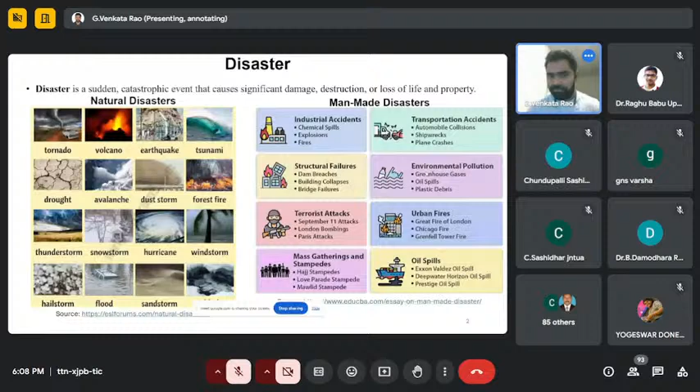The other category is man-made disasters. As I mentioned, any event that includes damage to property or loss of life can be called a disaster. Damage to property includes even motor vehicles or automobiles, for example, transportation accidents. If an accident happens, there will be damage to the vehicles involved, and also damage to the people in those vehicles. Such events are also considered disasters, but the magnitude will be small. Man-made disasters are more vulnerable because they occur very frequently, and among these, transportation accidents are very frequent and cause more damage.

If you look into a single event, it has a small magnitude, but when you aggregate all of them, it has a huge impact, even comparing to the other man-made disasters. But none of these will cope up with the natural disasters.

Here are some examples of natural disasters. If you recall the recent massive floods in Kerala, and the massive floods in Andhra Pradesh and Telangana earlier this year, unfortunately the high-resolution satellite images were not revealed to the public. So the only high-resolution satellite images I could find for the latest flood events were the Kerala landslide events that happened in 2024.

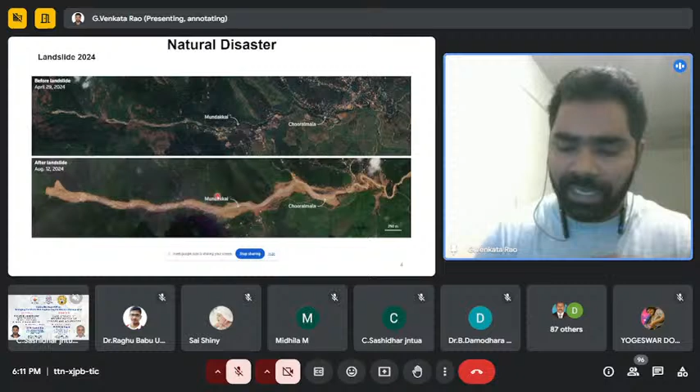If you look at the above satellite image, here the landslide happened and all the debris flowed up to this portion - this is the satellite image after the landslide. If you look into a closer look, here is a closer look for one section of that particular landslide area.

If you look at this particular image, taken before the landslide, there are so many buildings or houses - this is a residential area. If you look at the same residential area after the landslide, all the buildings got vanished. So that is the impact the landslide can have on humans or on property.

Here is another example of man-made disasters. Now everyone is familiar about the wars between countries because of the ongoing wars across the world. This is one image for an ongoing war, and this satellite image was taken before the war, on October 25, 2023.

For the same area, the satellite agency released a new image after the war. If you look at the new image, everything got vanished, and there are no proper road facilities or anything - because of this war, everything got vanished.

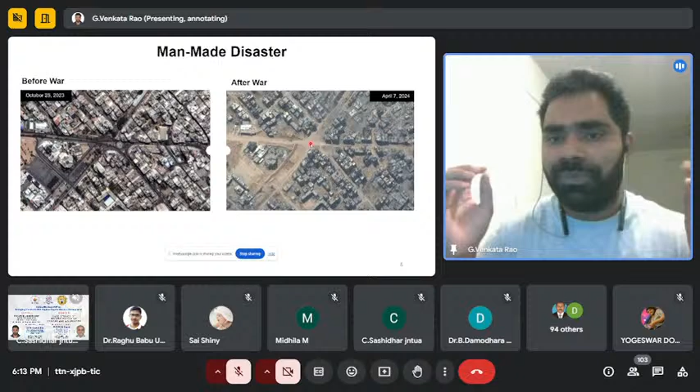So to minimize or assess the impact of these disasters, the effective way is having a disaster management cycle. Disaster management is defined as the discipline and profession of applying science, technology, planning, and management to deal with these extreme events. For example, if you want to assess the impact of a disaster, you need to apply the latest technology to do the disaster management effectively - applying science, technology, planning, and proper management to deal with those disaster events. The major focus of disaster management is to prevent and minimize the losses, whether to property or to human lives.

This can be done in four ways. The first one is mitigation or prevention. The second one is preparedness. The third one is response. And the fourth one is recovery.

Mitigation refers to the actions taken to reduce or eliminate the long-term risks and impacts of a disaster. For example, take Japan - everybody knows Japan is prone to frequent earthquakes. So the designers or people working in the construction industry in that country are well aware of the earthquake frequency and magnitude, how earthquakes occur there. When they design their infrastructure, they consider those earthquake magnitudes and design their buildings to resist or withstand that earthquake magnitude.

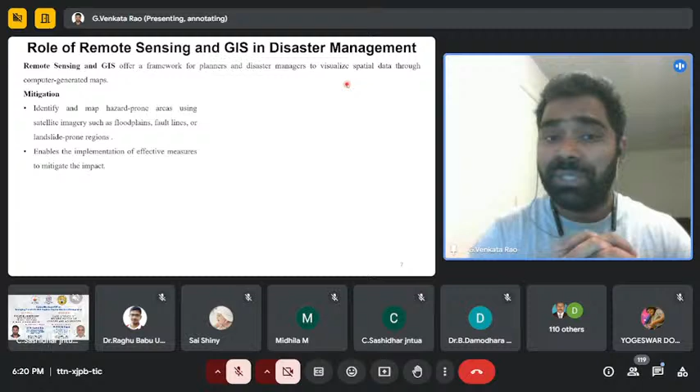When it comes to preparedness, remote sensing helps in identifying areas which require emergency attention. For example, when you have real-time data and there's a flood event happening in those locations, by just visualizing or looking at the map, you can direct your emergency rescue team to that particular area.

Another example: if there's a fire accident and the control room gets a call from affected people saying there's a fire accident happening in their area, the control room will identify the nearby fire department and pass the information to them so they can reach the area very quickly. That's another role of remote sensing and GIS in disaster management.

When you look at the maps, they provide relevant locations of the concerned departments for disaster management, the agencies and human resources personnel, where they can act very quickly to do rescue operations in disaster prone areas. Having a map simplifies strategy planning for security and shelter providers.

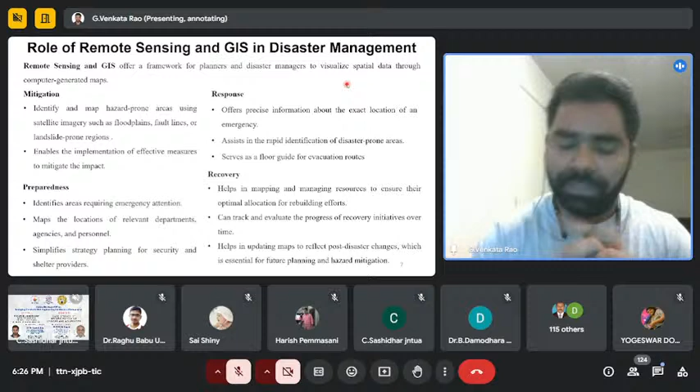Now coming to the basics: remote sensing is the science of obtaining information about physical phenomena of an object or feature on the Earth's surface, measured from a distance without being in physical contact with the object of interest.

For example, looking at this image, these are the features on the Earth's surface, and this is a sensor. If someone wants to collect information about features on the Earth's surface, they can do so from a distance, which could vary from one foot to thousands of kilometers.

Collecting information without physical contact—for example, even now I'm in a remote location for you, and you're in a remote location for me. We're not in physical contact, but we're exchanging words. This is also one kind of remote sensing—obtaining information.

So now you're getting information about the role of remote sensing and GIS in disaster management. This is one kind of information, a basic example of remote sensing.

Remote sensing is the art of obtaining information about features or objects on the Earth's surface. These features or objects could be anything—a tree, an insect, a human body, a house, or anything on the Earth's surface.

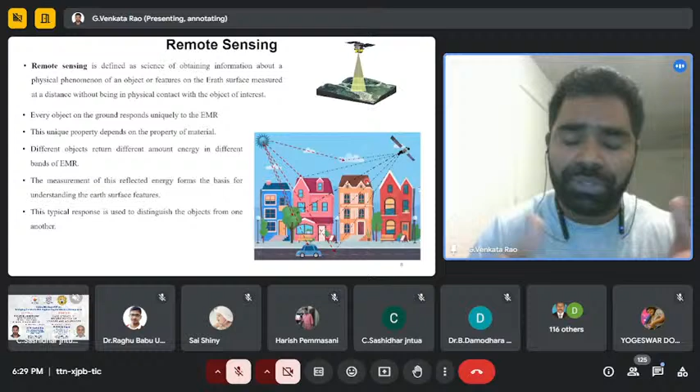Electromagnetic radiation consists of a range of rays, varying from gamma rays all the way up to radio waves. Among all these, only some portion of the electromagnetic spectrum is used for remote sensing and GIS purposes, mainly the optical region, which varies from 0.4 micrometers to 1 millimeter, consisting of visible and infrared regions used for data collection and analysis.

Since the past two or three decades, because of advancements in technology, people are also using microwave remote sensing for data analysis. Apart from microwave, there is another spectrum called radio frequency, which is used in geostationary satellites for satellite telephone communication, TV telecasting, towers, and so on. These are the electromagnetic spectrum ranges for each region of remote sensing and GIS, and they have different applications.

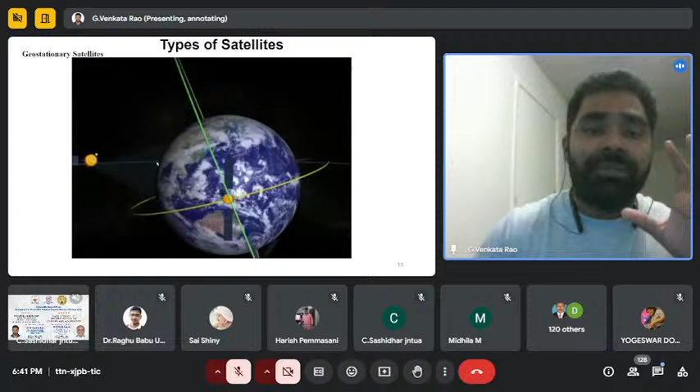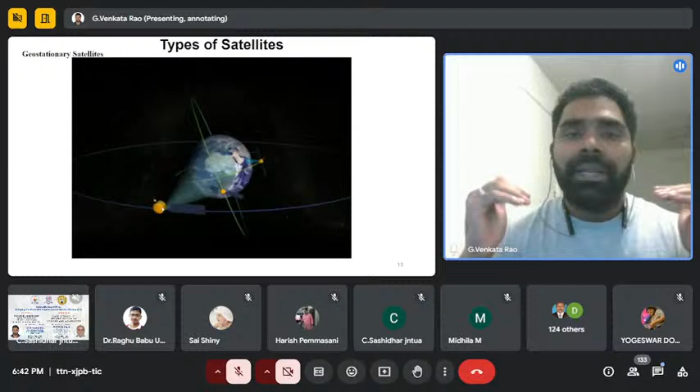For example, if you look at this particular image, this is the geostationary satellite which is placed at a height of 35,000 kilometers from the Earth's surface. Always this satellite will be looking at one particular area on the Earth's surface, and it takes one complete day to revolve around the Earth's surface, because the rotation speed of this particular satellite will be equal to the Earth's surface, and its position is relatively fixed to the Earth's surface, so that it will have continuous coverage for the same area over a period of time. These satellites are mainly used for communication purposes and some meteorological observations.

The next one is the polar orbiting satellites. The polar orbiting satellite means the satellite will revolve from North Pole to the South Pole, and it takes 90 minutes to complete one revolution around the Earth's surface from North Pole to the South Pole.

Basically for these polar orbiting satellites, active remote sensing sensors will be used, because on one side of the Earth's surface there is sunlight, and on the other side there won't be any sunlight. So to collect data even during night time, the satellite sensor should have the capability to send electromagnetic radiation and receive electromagnetic radiation. For that purpose, active remote sensing satellites will be used in this particular category.

The next one is the sun synchronous satellites. These are also a type of satellite which orbit from North Pole to the South Pole, but these satellites are designed in such a way that the path of the satellite gradually shifts, so their orbit gradually shifts to always stay aligned with the sunlight.

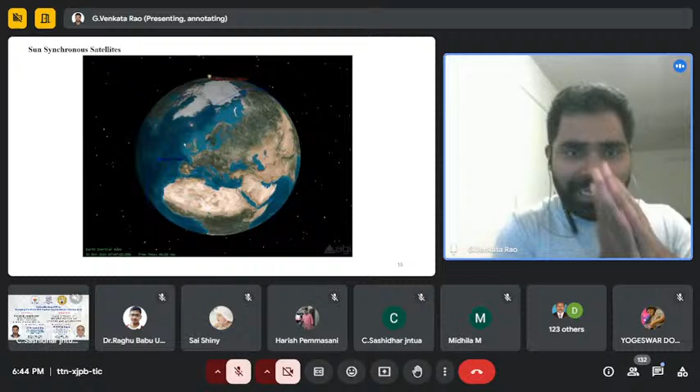For example, if you look at this particular region, the satellite is adjusting its orbit so that it can align with the sunlight. Whenever there is a transition from day to night time, at that location the satellite will align its orbit, and then it will collect the data continuously.

This kind of technology will be used in passive remote sensing sensors, because they don't have the capability to emit electromagnetic radiation, but they have the capability to collect the reflected electromagnetic radiation from the Earth's surface. So the sun synchronous satellites are basically used with some kind of passive sensors.

The next one is resolution. Resolution is the most important term in remote sensing, which defines the applicability of remote sensing data for any application, not only for disaster management but for any application - it could be land use land cover classification, soil classification, water bodies identification, or whatever it is. So the accuracy and analysis of the particular data will depend on the resolution of a remote sensing image.

Resolution is defined as the minimum distance between two objects that can be distinguished in an image. For example, if you look at an image and are able to distinguish two objects without any difficulty, then that will be called resolution. In remote sensing, we have four types of resolutions.

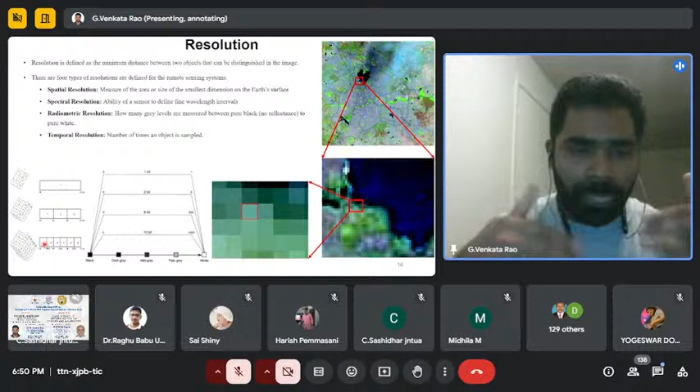The next one is temporal resolution, which means how often a satellite can visit the same area for data collection. As I mentioned, in a polar orbiting satellite, the satellite takes 90 minutes to complete one revolution around the Earth's surface. That doesn't mean the temporal resolution is 90 meters, but 90 minutes. Temporal resolution means the time taken for the satellite to visit the same area on the Earth's surface again.

The next one is spectral reflectance, the most important term in remote sensing to distinguish different objects. The basic principle of remote sensing is distinguishing different objects based on how much electromagnetic radiation is reflected from those objects. Based on that, each object will have a unique spectral reflectance curve, and objects are classified using these curves.

These are some satellite images, specifically Landsat images. As mentioned, passive remote sensing works in the visible spectrum, and they divided the entire visible spectrum into bands. These bands have different information. The first one, band one, is blue, ranging from 0.45 to 0.52, and then it varies for the other bands.

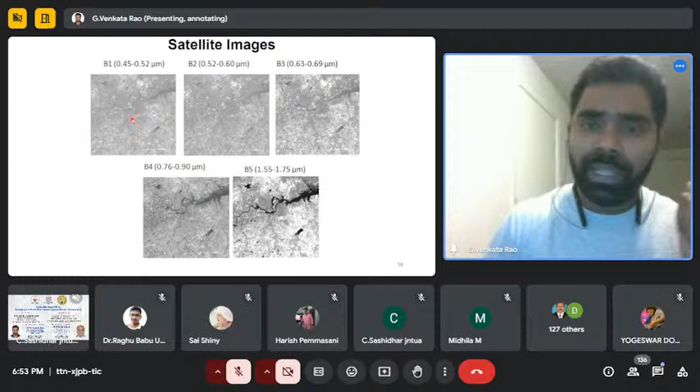And for vegetation also, the infrared region is the most effective, because that's the region where vegetation will have a maximum reflectance. And the next topic is Geographical Information Systems, GIS.

GIS is an acronym for Geographical Information Systems, and it is an integrated tool capable of mapping, analyzing, manipulating, and storing geographical data in order to provide solutions to real world problems, and to help planners or designers plan for future infrastructure.

GIS consists of 5 components: hardware, software, data, methods, and people. This is a GIS framework, which starts from input and ends at output, and in between it has different stages.

The first stage is data collection, input, and correction. For data collection, as I mentioned, from remote sensing data you will have a hard copy or soft copy maps. In India, the Survey of India is the main source for all of us to get topo sheets or Survey of India maps, and they provide those maps either in soft copy format or hard copy format.

When you want to use or analyze that data, you need to convert it into some digitalization format. Having a soft copy on your computer is not digitalization in the GIS framework. In GIS, digitalization means converting that data into editable data formats, and that is one of the steps in input data.

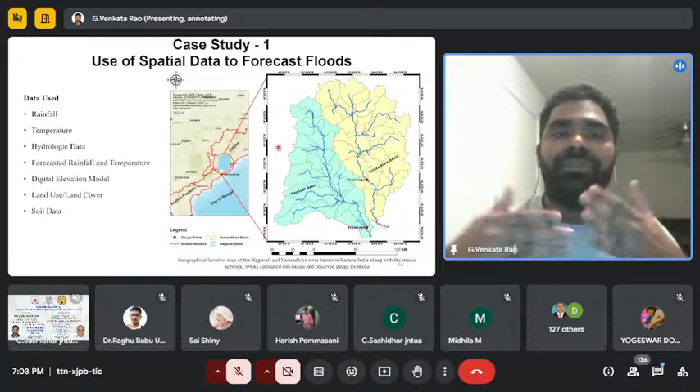The model has the capability to give flow estimates for each subbasin individually, but we don't have data to validate our model at any location except one in each basin. So we collected the flow estimates provided by the model at these two known locations, and then performed calibration and validation.

If you take monthly or annual data sets, then these statistics should be higher. For example, for monthly it should be around 0.75, and for annual it should be above 0.9. Then only those will be considered good. But when doing calibration for daily data, these will be considered good estimates.

So we did calibration and validation, and found that the model is working pretty well for the observed data. This is for the Nagavali Basin at Srikakulam Gauge Station, and then we did similar analysis for the Vamsadhara Basin at Kasinagar Gauge Station, and found slightly better statistics in Vamsadhara Basin compared to Nagavali Basin.

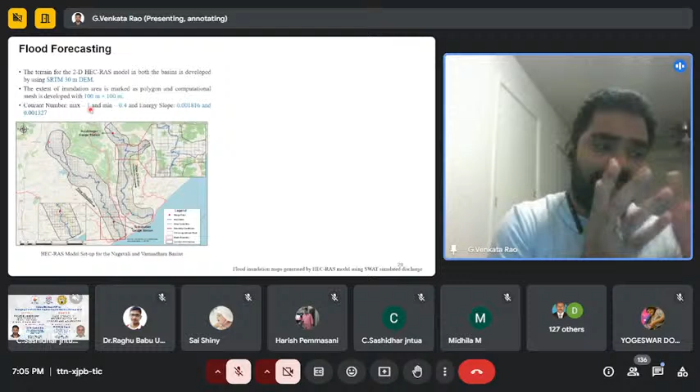Once we had all these flow measurements, we used a hydraulic model. Earlier, the SWAT model we used to convert rainfall to flow data was a hydrologic model. Now, once we converted rainfall into flow values, we used a hydraulic model which has the capability to convert flow values into flood inundation maps.

So here we used a HEC-RAS model to develop, predict, or forecast flood inundation maps in both basins. This is the effective area we used for flood forecasting. To forecast the floods, we marked this area and divided it into a 100 meter by 100 meter mesh.

We used these points as upstream conditions and gave the flow data at these locations. As we don't have validation at these locations, we validated the data at this particular location, and based on that, assuming the entire basin will have the same accuracy, we took the flow values at these locations and gave that as input to the hydraulic model.

Similarly, for the Nagavali basin, we gave flow data as input at these two locations and gave that as input to the basin.

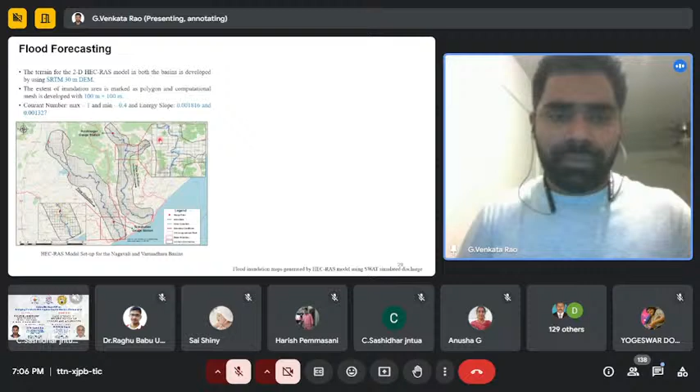Once after giving all the data as input, when we simulated the data, these are the flood inundation maps for the past events. We considered almost 16 events in the Nagavali basin and 16 events in the Vamsadhara basin, and we were able to generate flood inundation maps for each of these events.

And then these are the flood inundation maps for the Vamsadhara basin. So far, whatever model we developed was working pretty good for the past events. Now, based on understanding that this model works for past events, we started working on future events.

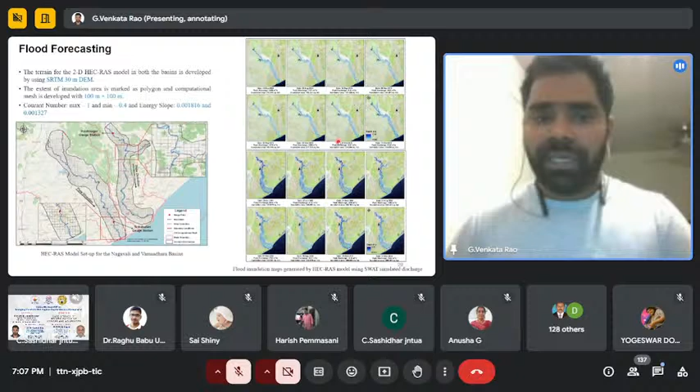For future events, as I mentioned in the data used, we used forecasted rainfall and temperature data to generate future flow data, and that was used to get future flood information about future flood events in these particular basins.

For that, we took one cyclone as a reference, the Titli cyclone, which caused severe flood in this particular Vamsadhara basin. This was the only data available for us to validate our model.

This is the actual flood inundation map, the actual area that got flooded during the Titli cyclone, and this data we got from NRSC. They provided this data on their Bhuvan website.

And then we used different data sets. The first one is the gauge data we got from CWC, Central Water Commission. And this is the flood inundation map generated by using that gauge data.

And then we used rainfall data provided by the Indian Meteorological Department to generate flow data, and we used that flow data as input for the hydraulic model to generate flood inundation maps.

Finally, to forecast the floods, we used rainfall from the Global Forecasting System, which has the capability to provide rainfall forecast for 16 days. We did proper validation and bias correction, and statistical analysis on those GFS data sets.

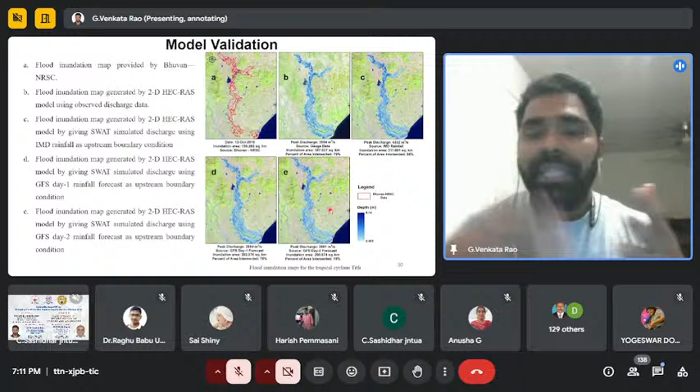So to do that, before that, based on all these flood inundation maps, we developed a vulnerability map, because now we know the flood inundation maps, since we considered all the flood events all the way from 1990 to 2018. And then we did all the flood inundation maps analysis, and based on all these past events, we did some vulnerability assessment.

That means how many villages, or what are the areas that are highly vulnerable to the floods, in both the Nagavali and Vamsadhara basins. And then we gave a statistical conclusion that almost an average area of 220 square kilometers, and at least 1 lakh people in 115 villages in the Nagavali basin are prone to the floods.

And if in future there is any flood alert going to be given in that particular Nagavali basin, then these first 115 villages need to be given priority. And the next one is around 270 square kilometers, and almost 135 villages in the Vamsadhara basin are prone to the floods.

So as I mentioned, it's not about how accurate our data is. Even if you have high accuracy data with you, if you're not communicating that data to the concerned authorities and to the people who are vulnerable to these disasters, then all the data is of no use.

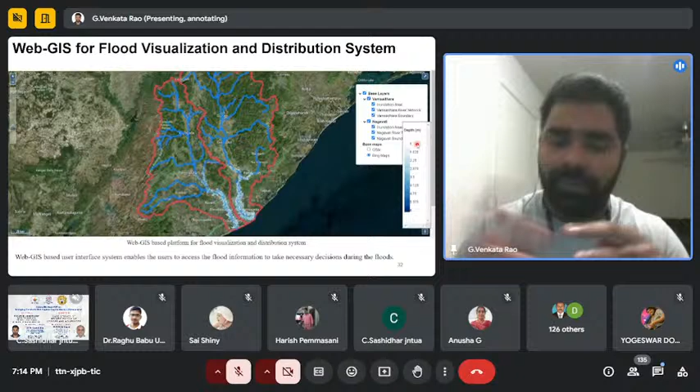And the other application is another disaster in India. I won't say it's a disaster, it's a frequent happening incident, that is the tropical cyclones. So starting from southwest monsoon all the way up to the end of northeast monsoon, either the Bay of Bengal or the Arabian Sea will experience some cyclones.

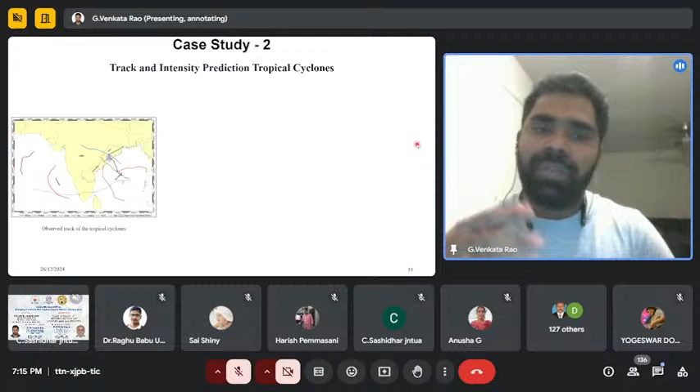And if you have prior information about the track and intensity of those tropical cyclones, then the government authorities or concerned authorities and rescue operators can plan their activities accordingly. And for that, I considered almost 10 tropical cyclones to develop a proper prediction system and all.

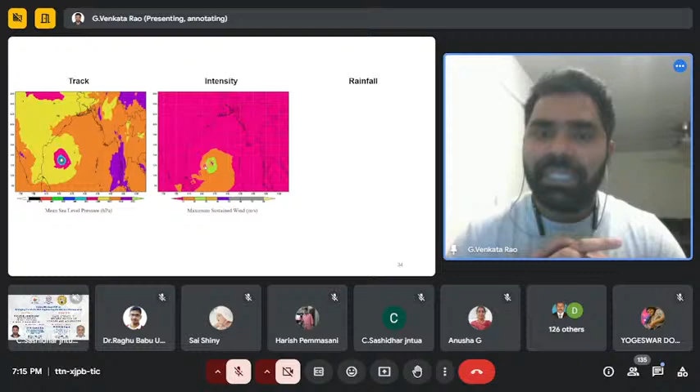This is the domain I considered for predicting tropical cyclones. I used the weather research and forecasting model to forecast these cyclones. Here is the predicted track for cyclone Hudhud, using mean sea level pressure to predict the track. We used maximum sustained wind to predict intensity, and finally predicted the total accumulated rainfall in millimeters for that cyclone.

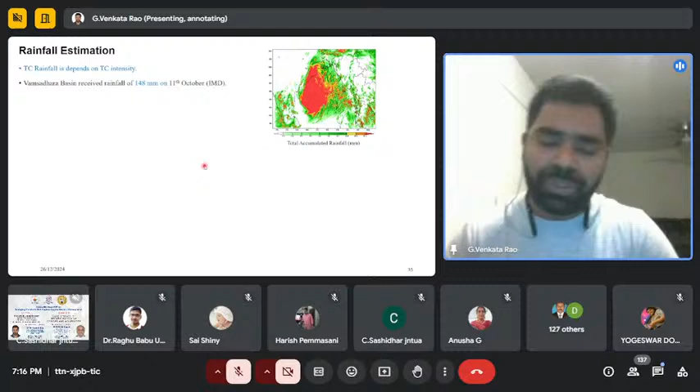We did some statistical analysis on how accurate the predicted rainfall was compared to observed rainfall. We considered the Vamsadhara Basin to validate our estimates.

From the observed IMD records, the basin received rainfall of 148 millimeters. When we compared that with our WRF model prediction, it provided nearly close estimates, around 200 to 220 millimeters. We also used global forecasting system rainfall data, comparing the forecasted rainfall with those data sets, which also showed good agreement with the estimated rainfall.

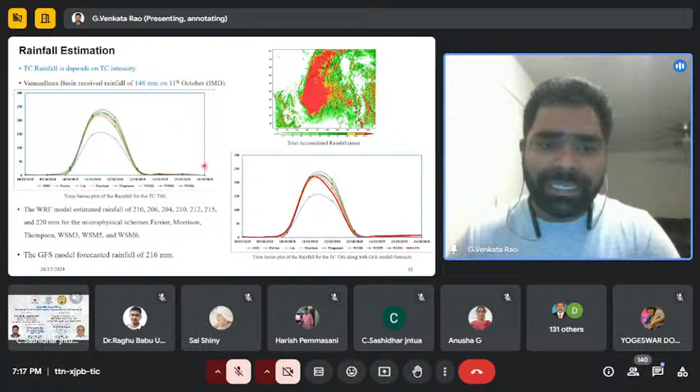There was a dam burst in Kenya on May 9th, 2018, caused by heavy rainfall in upstream areas. This dam burst took the lives of 48 people and caused large scale infrastructure and agriculture damage in downstream areas.

When the dam burst happened, since it's a remote area, we didn't have access to records of how much rainfall occurred. So we did this analysis completely depending on satellite, remote sensing, and GIS technologies. Some satellites provide really good estimates of precipitation.

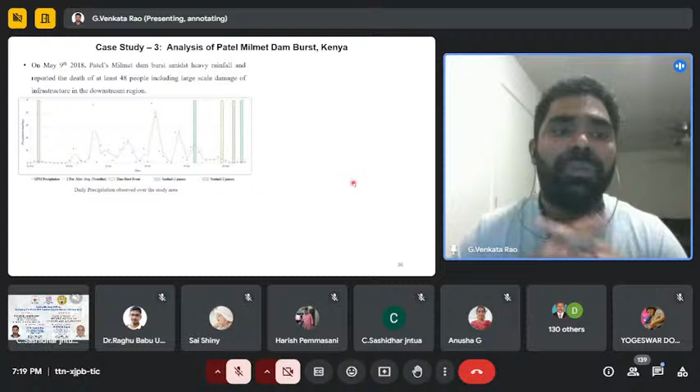So these are some examples of where you can use remote sensing and GIS for effective analysis. As I showed in my previous slides, remote sensing and GIS can be used for quick visualization of the magnitude of disasters that happen. That's all I have for today's presentation, thank you.

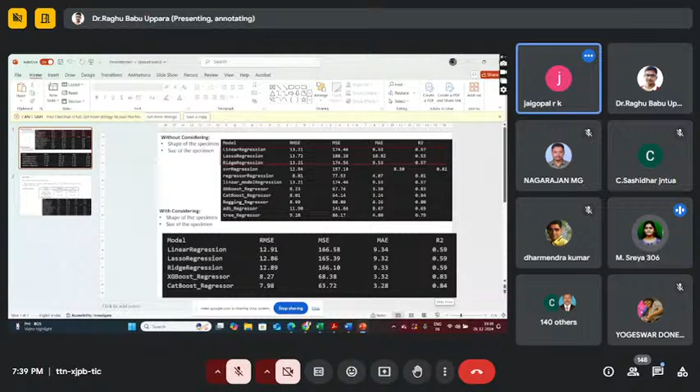Here, sir, there is a tab, right? Yeah, this one, I know. This one, sir. Can you see this one? Yeah, I can see that. No, I will have to make it, is it? We need to hit this button. Okay, this button, I'm stop sharing. Now please share your screen now, sir. Yeah.

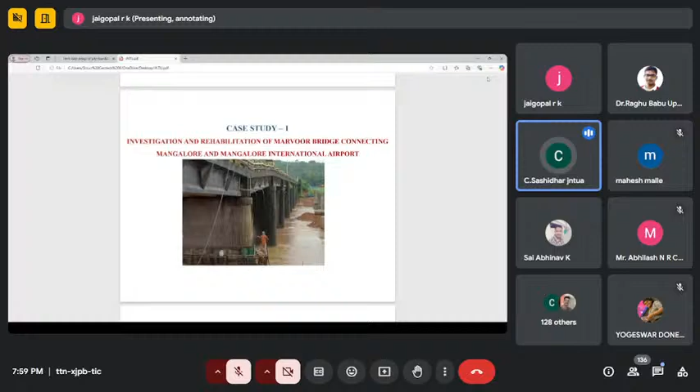I will continue. Sir, will you please zoom the PDF file, sir, if possible? In the top button, zoom, in the top, there it is, minus and plus buttons, right sir? In the top, in the middle, sir. Top, middle, this one? Yeah, that is okay, sir. Please click on it, sir. Yeah, I clicked on this. This is the thing.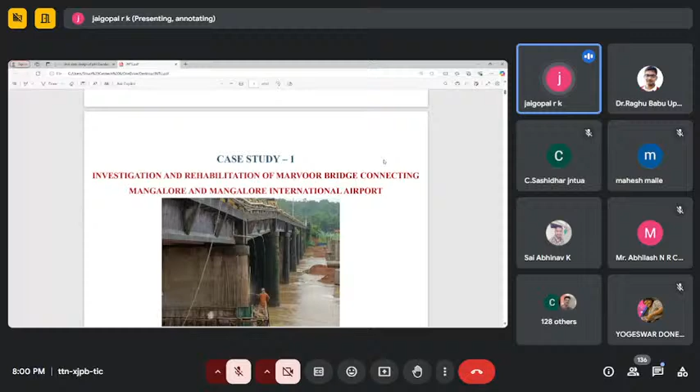Sir, just hit escape. Okay, escape. Now, see sir, there are minus and plus buttons there, right? This one? No sir, next one. Just hit on it sir. Plus, yes, right, sufficient? Okay yes sir. Just please scroll down, proceed, sir. While you are moving, just scroll the page. Okay, scroll the page. Yes sir, yeah, like this sir. Now it is good, sir.

I'll have to join the college again. Okay, anyway.

Now let me start with case study one, where we have done the investigation. Can you hear? I think now we can hear. Yes, good sir, it's good.

Okay, thank you. Case study of investigation and rehabilitation of Marvoor Bridge connecting Mangalore and Mangalore International Airport. This was the bridge actually. We did an investigation about 2 years back, I think. You can see here one of the piers here.

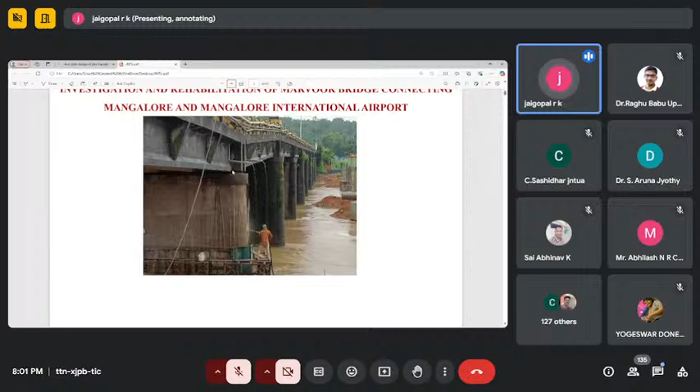One of the piers here went down into the river due to this scouring action. Extreme heavy flow was there in the riverbed. That's the reason it went down, and it was about to collapse. They suspected that it could anytime go down into the river. So that was an emergency case where we intervened and gave the rehabilitation.

The bridge is a vital link between Mangalore city and Mangalore International Airport, belonging to Karnataka Public Works Department. Length of the bridge is about 180 meters. It has 9 spans of 20 meters each. The bridge has RCC superstructure with 5 girder configuration and a deck slab. Pier and abutments are of RCC.

Piers are plate type. Pier and abutments are located on 2 RCC rectangular wells with a steining thickness of 450 mm. The depth of wells is 7 meter. Kindly note here, they were all old type well foundations.

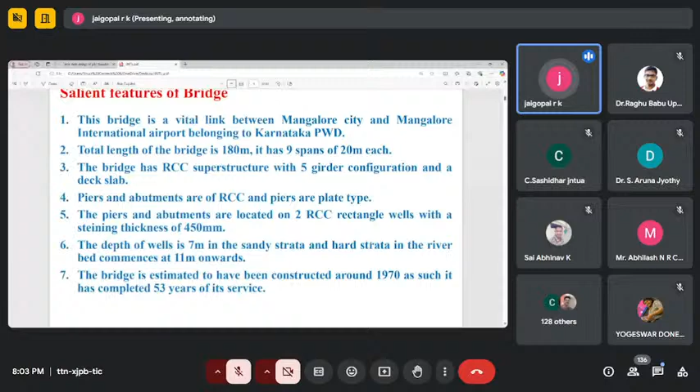Now, you can't see these wells nowadays because people are going for pile foundations. 7 meter is what we assume based on our earlier experience, because people are not going beyond 25 feet into the riverbed, as it was very difficult to work below 25 feet. So we assumed, and when we actually verified, it was only 7 meter into the riverbed, into this sandy strata. The bridge is estimated to have been constructed around 1970.

As such, it completed 53 years of its service. The sequence of distress was: there was extremely heavy rain and flooding in the river on 13th, 14th and 15th of 2021. Pier number 8 of the bridge suddenly sank into the riverbed by 700 mm on the 15th at 2:30 a.m. in the early morning, that is in the midnight, precariously positioning span number 9 and 8. Traffic on the bridge, including pedestrian traffic, was suspended.

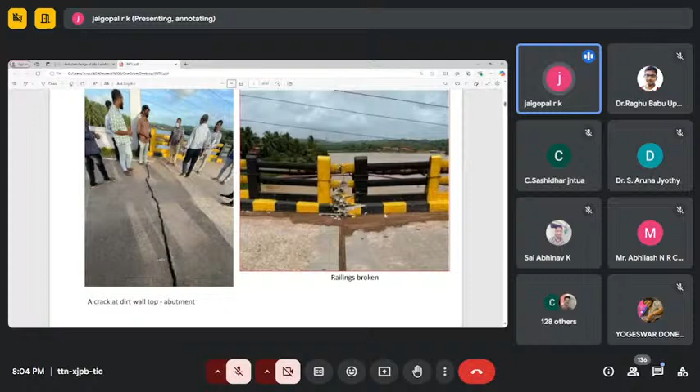Hope all of you can hear. Hello? Yes sir, yes sir. Okay, okay. The probable reasons for this scouring in the riverbed are the location of pier P8.

It reached almost 7 meter or more on the 15th, destabilizing both the well foundations, because one pier had 2 wells each under it, but they did not get washed out due to the water flow. That's a good thing, that the well foundations only settled down and did not wash out.

The well foundations as well as the pier sank into the riverbed by 700 mm, and it also resulted in shifting of both the wells. Kindly note here, you can somehow manage to correct the 700 mm that sank inside the bed, but the 300 mm shifting, that is sideways lateral shifting, is quite difficult to correct, because in those days they must have designed for all vertical loads and lateral loads.

There must not have been a provision for this at all. But we will have to take this into account, take some precaution, and take a risk that the 300 mm of lateral shifting that happened needs to be corrected while doing the rehabilitation. The pier has become three-dimensionally eccentric. That is the situation as far as this pier is concerned.

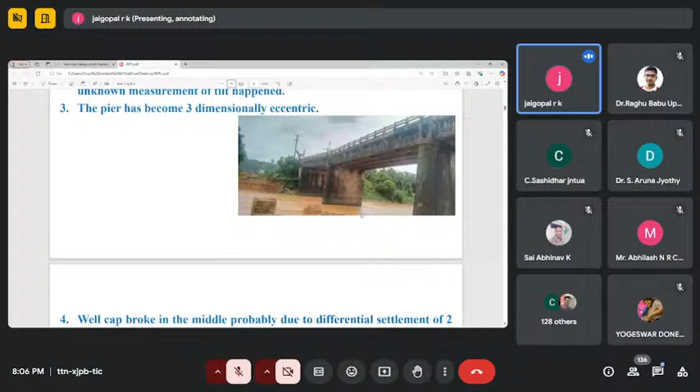This one - then, the result of that three-dimensional movement of the well of the pier resulted in the well cap breaking in the middle, probably due to differential settlement of the two wells, because this pier has got two wells here. You can see here one rectangular well, the other rectangular well. This one settled more compared to the other one, and that has resulted in the breaking up of the well cap here.

Here you can see there is a crack here, there is a crack here. These two cracks happened due to the breaking up of the well cap. Please, you can ask me any question in the midway also, it's okay.

No sound from that side. Hello? Yeah sir, yeah sir. You are audible sir, please continue sir. Please react a little bit here and there. Okay sure sir, sure sir.

This is the problem where the well on the left side is a rectangle well. You can see the cap there, well on left side, well on right side. These are rectangular wells, peculiar wells. Earlier we have seen circular wells, octagonal wells, whereas these are rectangle wells, 2 numbers per pier.

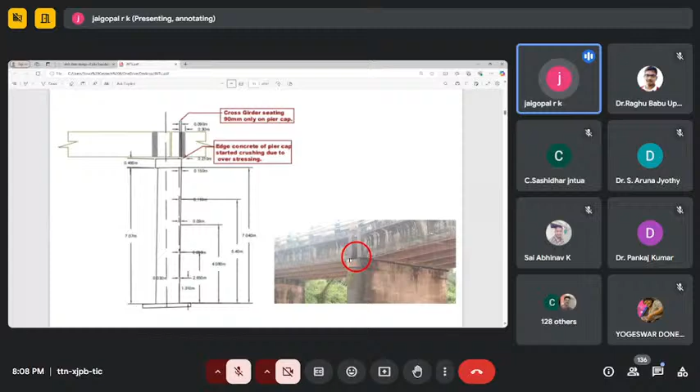This is the diagram of what happened when it got into the riverbed with side movement. You can see here, it was just the superstructure on the left side sitting hardly on the edge. The concrete of the pier cap started crushing due to over stressing. Because of the extreme stress, it was about to collapse, but somehow it was sitting by about 90 mm onto the pier. Otherwise it would have gone down and actually crushed the pier cap.

The precautions taken were: the situation was very fluid, wells were sinking, and the structure needed emergency measures to stabilize the foundations, or else two spans could collapse any moment. Even the pier along with the foundation could go into the riverbed or get washed away.

As an emergency measure, big size granite boulders of almost 1 meter size were packed. We had lost the frictional capacity of the well foundations in the sandy riverbed, so we needed to create frictional properties so the wells would have friction on the sides - soil structure interaction must be there. Earlier sand was there, now it was washed out, so we needed to put something. You can see the boulders brought from outside, and wherever scour happened in the riverbed has been packed and filled back with these boulders.

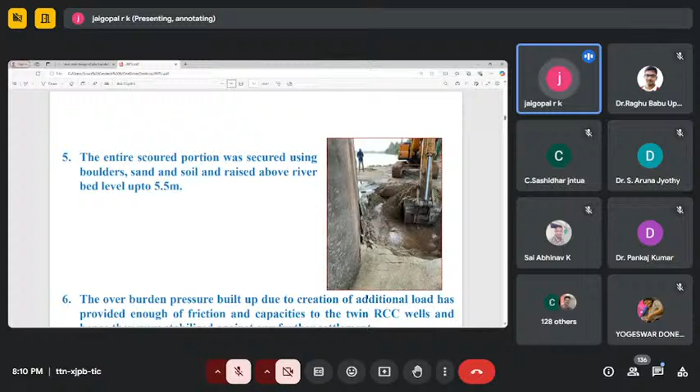Now the entire scour portion was secured using boulders, sand and soil, and raised above the riverbed by 5.5 meters. This gave us confidence that further movement and further sinking of the pier would not happen. Having created this barrier so the pier would not go down further, the already settled portion of the superstructure needed to be corrected.

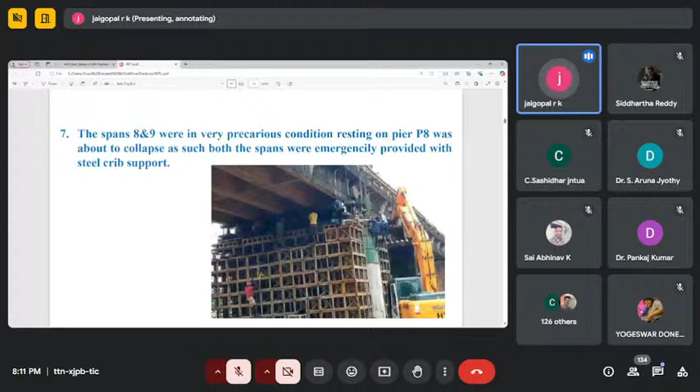So what we did was immediately procure some girders - a railway supporting system - and cribs. After placing the cribs temporarily, we placed certain jacks and lifted the left side span, placing the entire superstructure onto the cribs. We did the same on the right side also. There was a gap of above 700 mm above the pier without any support, but both superstructures were placed on temporary supports - the cribs acted as temporary supports.

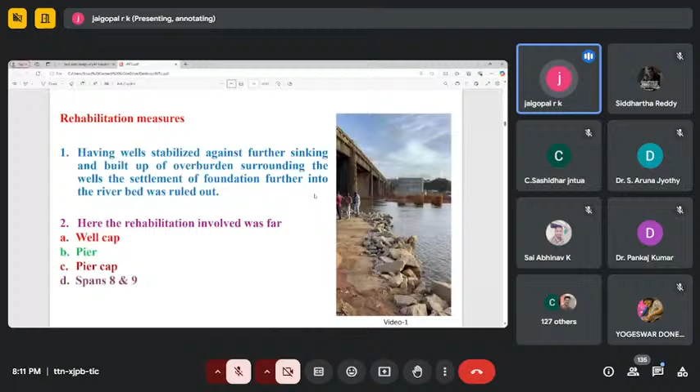Then came the rehabilitation measures - having the wells stabilized against further sinking with overburden built up surrounding them, further settlement of the foundation into the riverbed was ruled out. With that precaution taken, we had confidence the bridge could be saved. The rehabilitation measures involve the well cap, pier, pier cap, and spans 8 and 9 - 4 items to be tackled.

Coming back to the well cap, it needed to be rehabilitated because it broke - virtually it was not taking any further loads. You can see here, there are 2 cracks in the well cap. At any time it could break further, and the crack could propagate up into the pier. That was the situation, so we needed to do some exercise.

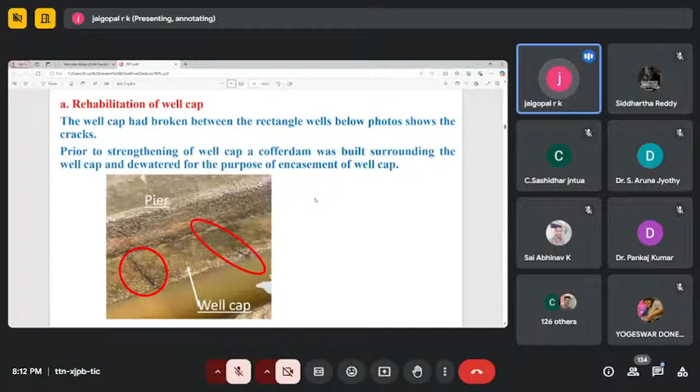That means we stitch the existing well cap with a new well cap and anchor it to the pier also, like this. You can see on the right side, this is the anchoring arrangement made. This is the existing well cap, this is the new well cap designed. The concrete strength was maintained at M70 so that the broken, lesser strength concrete inside is encapsulated using new concrete and new reinforcement. That way it was strengthened, along with the pier also.

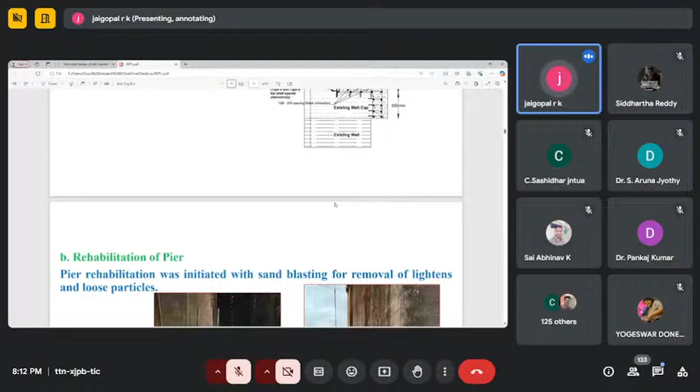This is where we started using sandblasting so it would have a better bond between the new and old concretes, along with bonding using epoxies.

This is the diagram - on the left side, the thickness of the pier encasement we did was more. On the right side, encasement was lesser, just to maintain the center of gravity of the whole pier. One side was more, other side was made lesser, which did not have any effect on the well foundations because we had already given full frictional capacity to the well foundation so that it doesn't move at all.

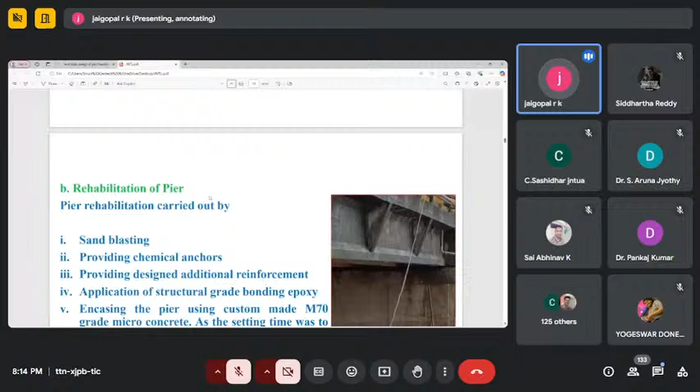This is one more drawing we prepared for anchoring the old and new concretes. Pier rehabilitation was carried out with sandblasting, chemical anchors, additional reinforcement was designed, and structural grade bonding epoxy was applied, encasing the pier using custom made M70 grade micro concrete. The new pier encasement got fully integrated with the existing pier, well cap and wells. This is the picture of the rehabilitated pier - you can see here on the right side.

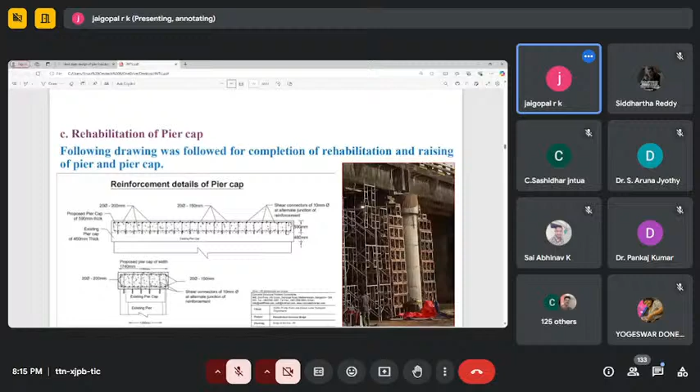Then you need to see here, there was a gap of about 700 mm which went down into the river. Both spans were simply stationed on temporary crib supports on both sides. So this cap was increased - the pier cap was increased by almost 700 mm so that it comes to the original level of the pier cap. That was one exercise we made. Again, we designed the whole of the pier cap and it was attached to the existing pier cap.

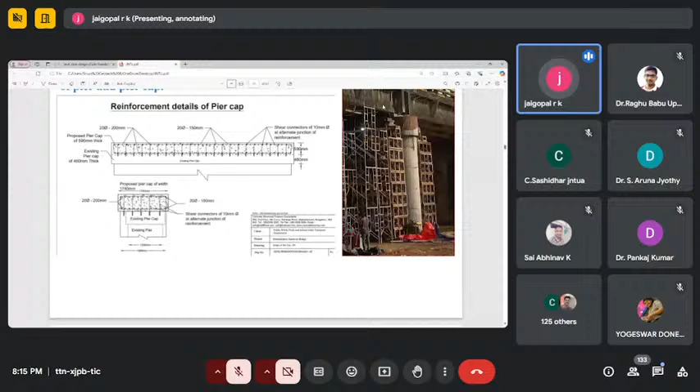I'll just skip a little here. Again, the bearings were placed, and after placing the bearings, we rested both structures, both spans on the neoprene bearings. The neoprene bearings were designed and placed below the girders here - we don't have a photograph of that, but that is what happened, I am telling you.

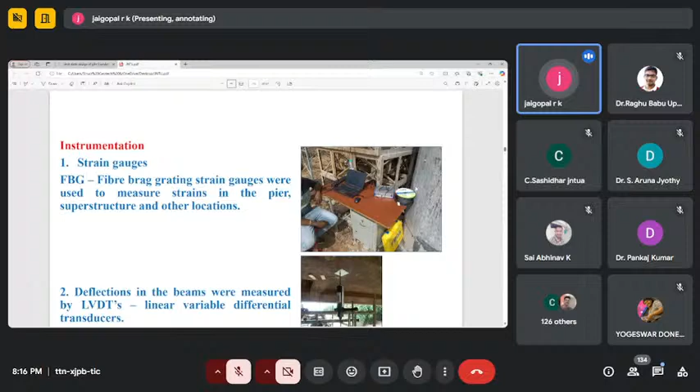And to check the strains in the pier, we provided FBG, fiber bragg grating strain gauges, which are absolutely accurate, at various levels to check the strain measurements in the pier, whether they are well within limits or any breaking is there. So we were verifying that. Deflections in the beams were measured by LVDTs, linear variable differential transducers. Temperature was measured by the thermometer.

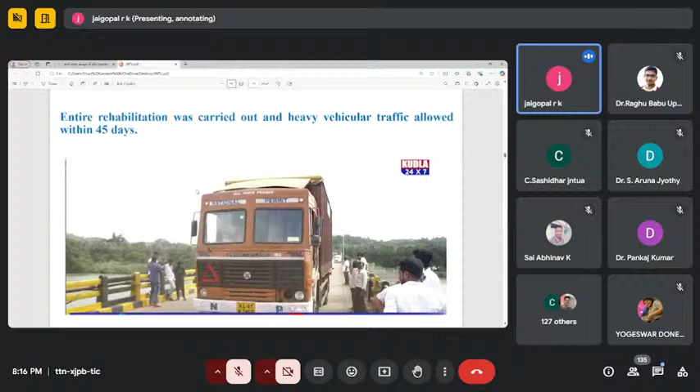Of course, load testing was carried out there to check whether the superstructure is in condition and transferring all these loads to the pier. It was verified as per the load test as per IRC SP 37, and the entire rehabilitation was carried out and heavy vehicular traffic was allowed within 45 days. There was resistance also from the public works department not to allow heavy vehicles - only cars or light vehicles, LMVs. So I told them, when we have done such a hard job, allow heavy vehicles in front of me only, in front of our team, so the public will also get confidence in using the bridge. That way, rehabilitation was completed successfully, and the public works department thanked us. In fact, the local MLA praised us so much, it came on TV continuously for 2 days.

Now, case study, I will just skip - because again it's a bridge, I'll show this some other day. Let me shift over to the aqueduct.

This is one of the important aqueducts which I wanted to show you for about 10-15 minutes. The rehabilitation of this aqueduct, 70 years old, washed out due to scour. This is the Hagri aqueduct, just at the border of Andhra Pradesh and Karnataka, about 3 kilometers inside Karnataka, built in I think 1953, with the piers fully dressed in stone and very neatly done work - unimaginable actually.

This aqueduct has octagonal wells - you must see the photographs, you will be surprised. And the dressing of the pier with fully dressed stones - I don't know, it is simply impossible nowadays to get these people and do such work. And that too, this is an aqueduct.

It was not at all leaking, absolutely no leak at all, for about 700 meters. No leakage in any of the joints, nor in the concrete, even after about 70 years, with no maintenance either. This is due to the honesty in executing the jobs - I can say it is absolute honesty. That's the reason it doesn't leak. If it were done nowadays, certainly it would have leaked.

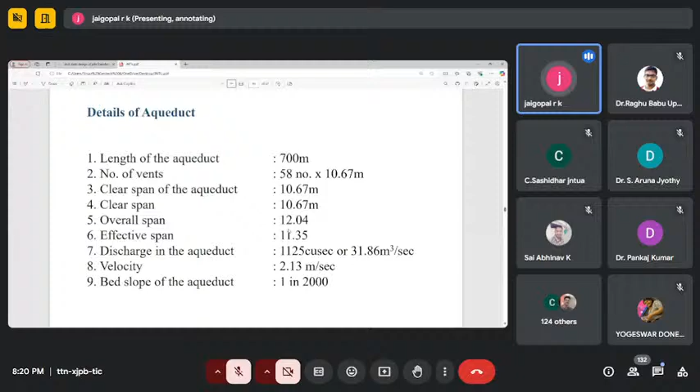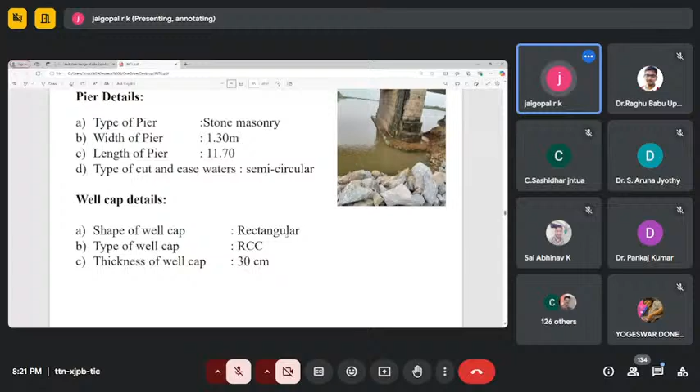Shape of the well cap is rectangle. Type of the well cap is RCC. Thickness of well cap is 300 mm, which we don't do nowadays, for your kind attention. This is 30 centimeter, 1 foot. Those days, whatever we have seen, majority, even what you saw in Mangalore, that is also 1 foot, 300 mm, which we don't do, because nowadays our cap designs, well cap or pile cap, are based on the strut and tie method of designing, which requires at least 1.25 to 1.5 meter thickness of well cap. That is the requirement of Indian Roads Congress nowadays.

You can see here, these are all damaged due to the settlement of piers caused by heavy water flow. It never happened before, hardly about 5,000 cusecs they were releasing in the river for the last 50, 60, 70 years. But suddenly, about 2 years back, they released about 1 lakh cusecs on that particular day. 1 lakh, where is 5,000? Where is 1 lakh? That has washed out. Cover was abundant, absolutely so much cover.

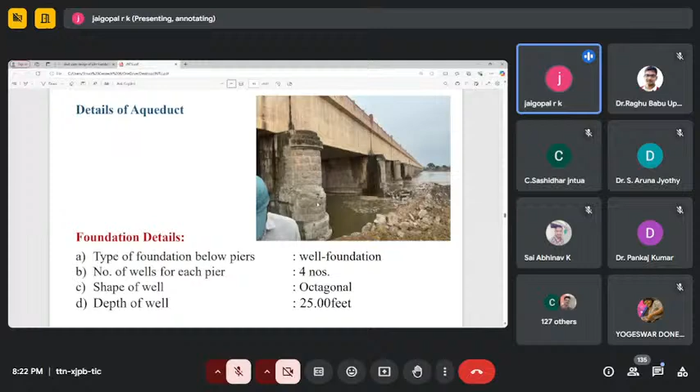Again here also, this looks to be about 7 to 8 meter depth wells only. Each pier had 4 wells, 4 octagonal shaped wells below each and every pier. Foundation details: well foundation, number of wells per pier 4, shape of the well octagonal, depth of well is 25 feet only. That is the problem actually.

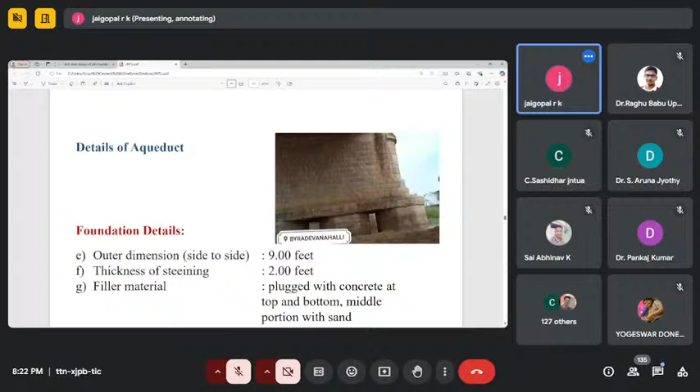Here you can see the wells, aqueduct foundation details. Outer dimension is about 9 feet. Thickness of the steining, which means wall thickness of the well, that's what we call steining, is about 2 feet. Filler material is plugged with concrete at the bottom and top, middle portion with sand. That is well plugging, what we call.

You can see here these are the well foundations, 4 number of wells. I think meticulously calculated, there is no rough and tough method. Absolutely fully calculated: how much load coming from the top, what is the buoyancy, how much load to be transferred to the riverbed, 4 number, size of the well, everything they have done. In fact their calculations are much better than what we do now using our computers and all.

Load considered for foundation is 1,000 metric tons. Type of soil strata is sandy.

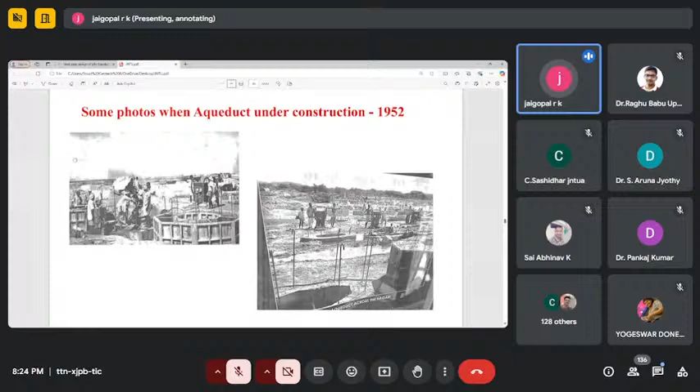Some more photos when the aqueduct was under construction. This clearly indicates sincere and honest work going on here. Hagari aqueduct concreting on the right side. I told you, we have so many machineries now, so much super plasticizer, hyper plasticizer, water reducing agents into the concrete, and so many chemicals for water reducing and strength increasing, whereas those days there was nothing but only cement.

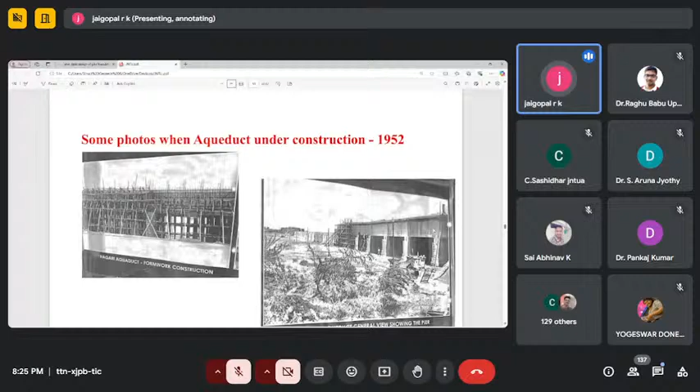See here, cement and tamping. I doubt very much they had any vibrating, maybe a little bit they are vibrating. See here, hand on the head, she is carrying the concrete and putting it there, and they are tamping. With this concrete, we checked virtually, this concrete has been checked by my office. See here, superstructure with bamboos, superstructure with bamboos. Hagari aqueduct general view showing the pier.

These are old photographs that we collected from the Tungabhadra dam authorities.

From 8 to 27 of September, the aqueduct underwent severe distress as against 3 to 4,000 cusecs, 1 lakh cusecs of water passed below the aqueduct, resulting in distress to Piers P9, 10, 12 and 13.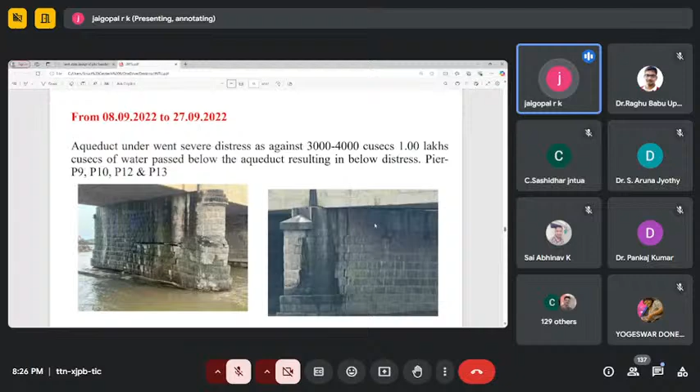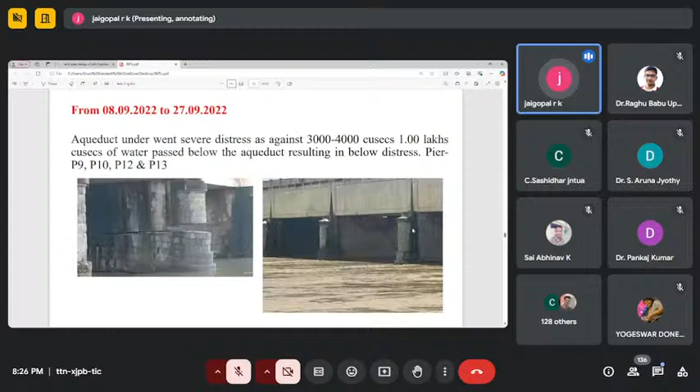Here again I am showing various distress conditions. See here, it is as good as collapsed - for our technical reasons it is collapse. Here you see they were all cracked up and so much water was passing through.

On one fine day, engineers noticed on date 13/10/22 that pier number 15 had completely washed out, but the superstructure was still standing without any distress. You can see here there is no support at all. Water is passing inside, fully passing. Water weight itself may be about 100 tons - 100 to 200 tons of load of water is passing through the aqueduct.

There is no support at all here - absolutely no support, it is standing like that only. Even I went there. It's an engineering thing - it is due to the compressive action of the rectangular portions of the aqueduct that must be holding it in place. Again, I tell you, it's goodwill and God's grace that it didn't collapse at all. It never came down, and water was flowing to the crops.

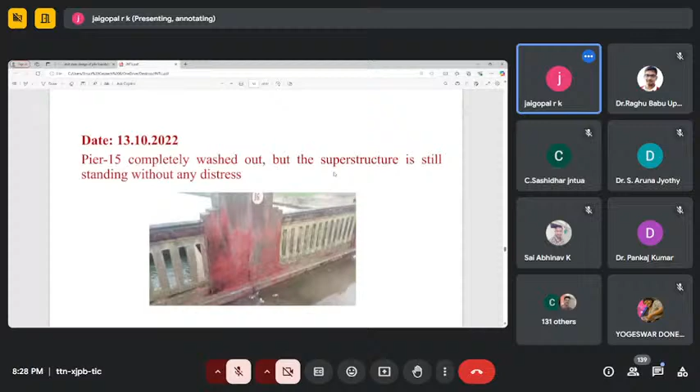This is one more photograph, and here on the top - I went on the top myself. You can see water flowing in the aqueduct. This is the pier. Below this, it had washed out, but the superstructure is still standing.

Various rehabilitation measures were thought of, and it was a very dangerous situation to go below both spans because there was no support - it could come down any moment. The proposal was that whatever washed out portion below was packed with boulders and sand, and we put some high girders to give support to the pier portion, so that the earlier pier portion could be supported by some method to take the water load and superstructure load.

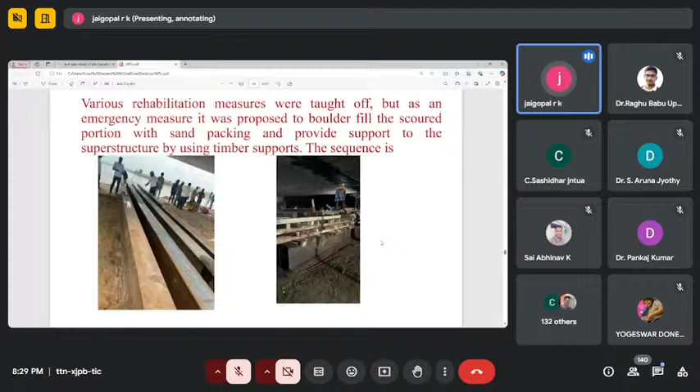We designed this based on plenty of experience in lifting bridges - we used to lift a lot of bridges for replacement of bearings, so we had plenty of experience. We brought some timber and tested it for compressive strength, then cut the timber at a nearby mill and prepared the ground for placing this timber so that the load on top could be transferred onto it.

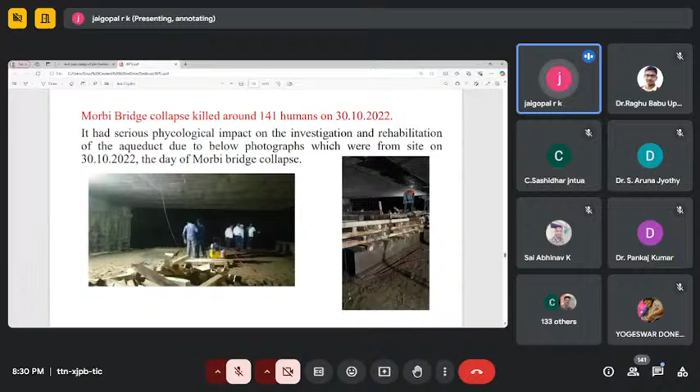At the same time, the Morbi Bridge collapse happened in Gujarat, killing about 141 human beings. This had a serious psychological impact on the investigation and rehabilitation of the aqueduct, due to photographs from the site on the 30th, the day of the Morbi bridge collapse. Everybody was afraid to go below our aqueduct - nobody was prepared. Then somehow we managed.

Various rehabilitation measures were thought of, but as an emergency measure, it was proposed to do boulder filling, along with timber and some steel plates given at the bottom. You can see here some sand filling, boulder filling, and timber. This is the pier where it disappeared - after disappearing, it started leaking slightly, not very much.

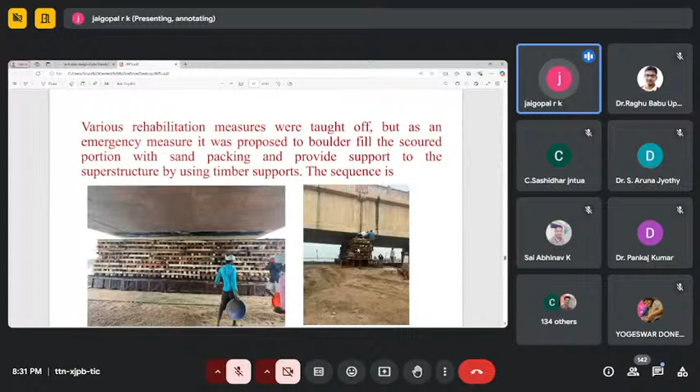So you can see here, we kept 4 jacks and lifted both sides of the superstructure at the pier where it collapsed. Special hydromechanical jacks were used - these work on both hydraulic and mechanical systems, and were specially introduced by my office so that we could lift it up.

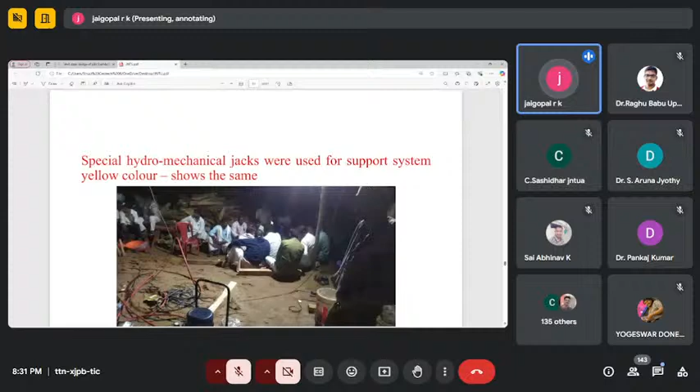You can see here, after placing the jacks, one of our ministers, in the white shirt, came down and sat there below. I told my staff to remove everybody from below because it's very dangerous to sit freely underneath discussing this problem.

This is one more photograph where all the supports were given. Once the supports are in place, there is no issue at all - it only has to be properly rehabilitated later. This is the pier, and additional crib supports were given on both sides so that we can start the rehabilitation of this pier.

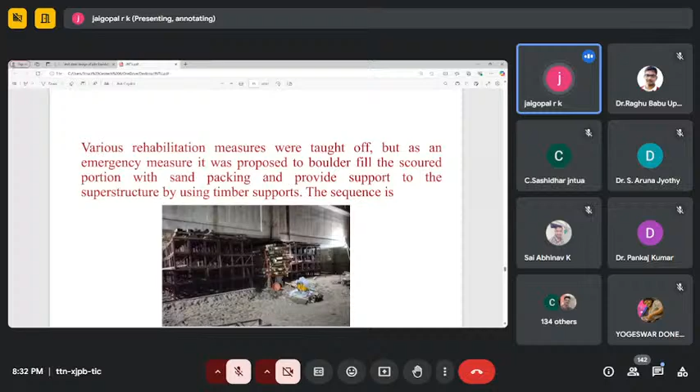This is one more picture of the pier support with the timber and steel girders. Then we were supposed to give support there below. This timber support cannot continue continuously, so what we did was we provided...

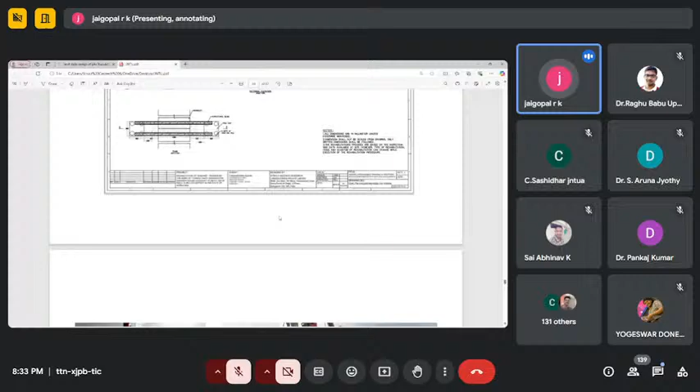I'll show you, we provided here 4 piles on the upstream. These 4 piles, then we provided 4 piles on the downstream, both sides. 4 piles this side, 4 piles that side of the river. Then we connected both this...

with a pile cap. Then we connected the left side and right side with steel girders, so that loads get transferred onto the girders and onto the pier cap, so that pile cap, so that the piles will start taking the load of the aqueduct.

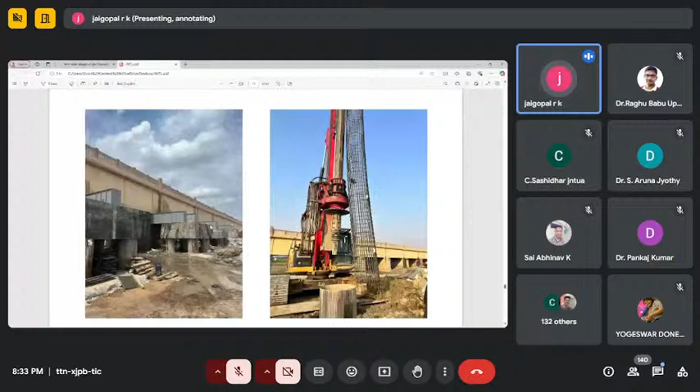We did it for almost about 7-8 piers, so that way it got transferred, load got transferred onto the, see, this is one more picture.

This is the only way out, because you cannot raise anything below. It's always covered, you can't get anything there. We provided these piles up to the extent of below, in the sense we took the piles up to the rock level, which was about 18 meter or 20 meter, and we made the socketing there and they were raised from that level. So it was out of the pier.

You can see here pile caps on the left side. So on the left side as well as on the right side, the angles, this structural steel was put there to transfer the aqueduct loads onto it.

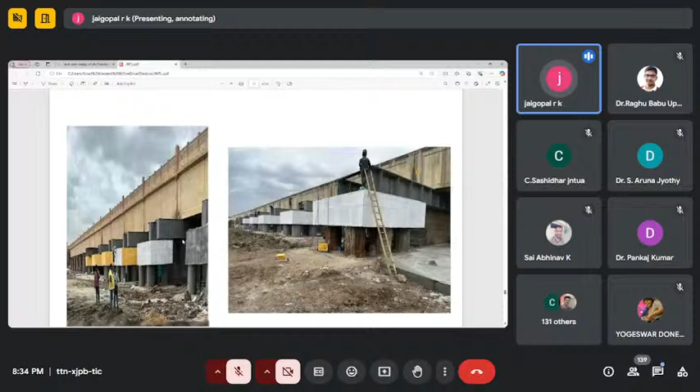See here, even we continuously did that, nothing, water continuously was flowing in the aqueduct. This is, you can see on the left side, same quantity is also flowing below the road there. You see on the right side, same quantity, because the aqueduct normally will have a vertical wall in the middle. So this is the vertical wall, and this is the aqueduct. There is one more opening on the right side, which is below the road. Same quantum of water is flowing there also.

Now, I think some other day I will be able to show you the case study. These are all small things. I think this should be sufficient for today, the aqueduct emergency, and what we have taken care of in rehabilitating that.